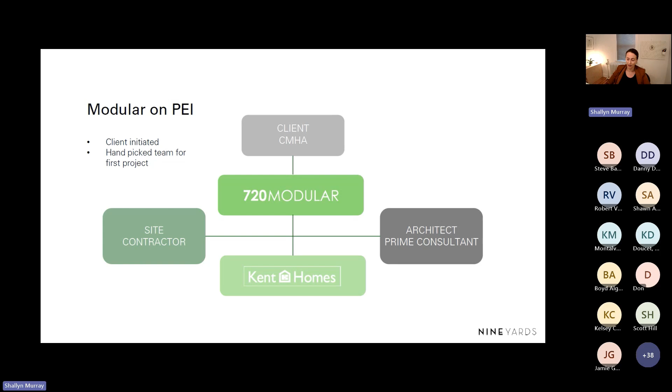Since that time, we've done a lot of modular projects. We have 5 built projects: 2 are apartment buildings, 2 are overnight emergency shelters, and 1 was an office building. In progress right now, we have 2 of our largest buildings to date, 6-story apartment buildings, 1 family housing and 1 seniors housing. They will be by far the largest volumetric modular projects done in the Maritimes and across Canada, really. And concept designs: municipalities in particular are looking for designs that can be modified to fit many different sites and areas. These are some of the proposals we've put out over the last few years.

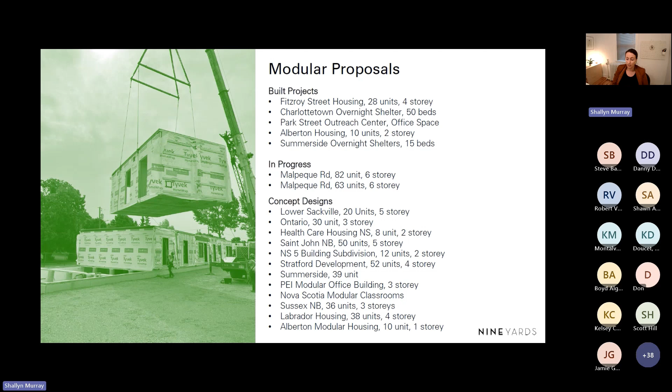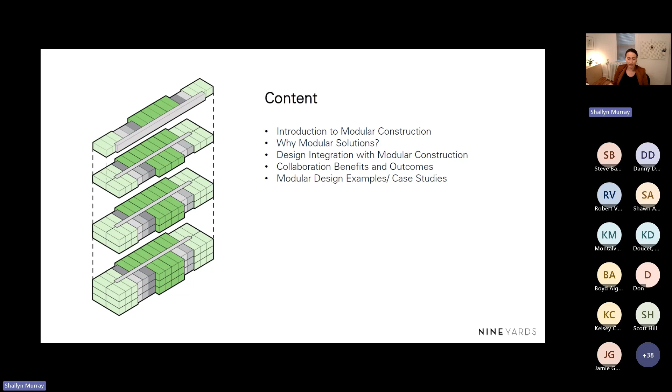So just a little summary of today. I'm going to keep this fairly high level, but I want to talk about why we would consider modular, some of the design principles that integrate with modular construction, the collaboration aspect of these types of projects, and then I'll go through the few projects that we did. I think I have about 30 to 40 minutes, so hopefully we have a little time for questions at the end.

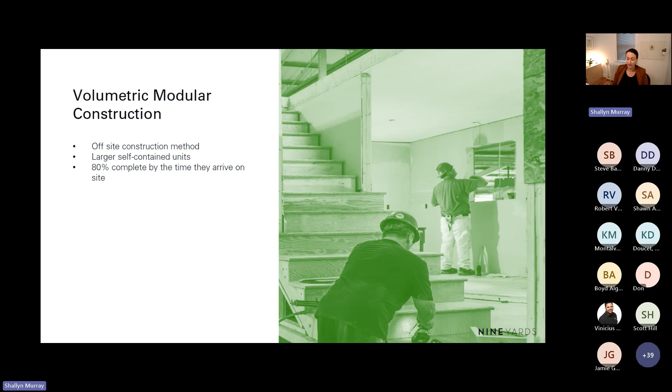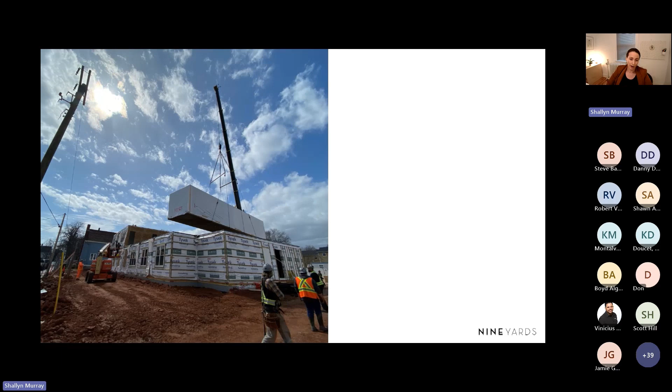So just to start, I want to clarify that modular construction is basically anything that's fabricated off-site. But for this presentation, I'm talking specifically about volumetric modular, which encompasses large self-contained units. So we're not talking about panelized construction. These come as boxes that are pretty much 80% complete by the time they arrive on site. To give you a visual, this is one of our projects being craned in. Each module is fully complete and wrapped for weather protection when it arrives.

So getting into why modular, I mean, I know that everyone here is probably very aware of our housing issues that we're facing across Canada, but I wanted to put a few numbers to it just to sort of paint the picture a little bit. So, PEI needs to construct about 2,000 to 2,600 housing units a year to accommodate our growth, and that's after catching up to the deficit that we already have.

As of recent assessments, Nova Scotia has a housing shortage between 25 and 30,000 and projected that we'll need over 100,000 new dwelling units by 2032. And in New Brunswick, we've experienced a reduction of approximately 8,600 affordable housing units, which represents a 25% decrease. And also mentioned is that all the rents have doubled and tripled.

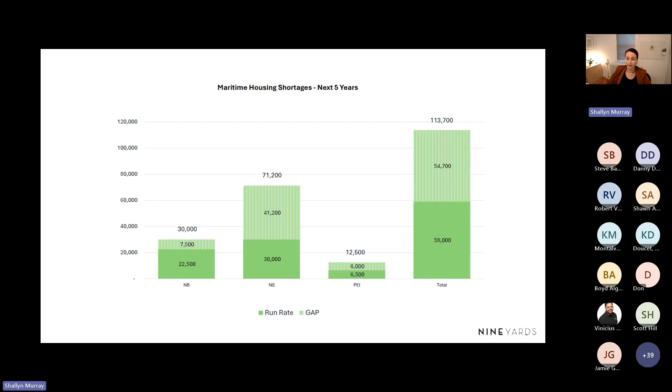And so I think we all kind of realize that we're in a bad position housing wise, and that we need to find as many solutions as possible to get more housing on the market as quickly as we can. And this is just a chart illustrating that, again, for the Maritime provinces specifically, the sort of gap in the light green of what we need to fill in the next 5 years. So modular becomes one of those solutions that we can consider.

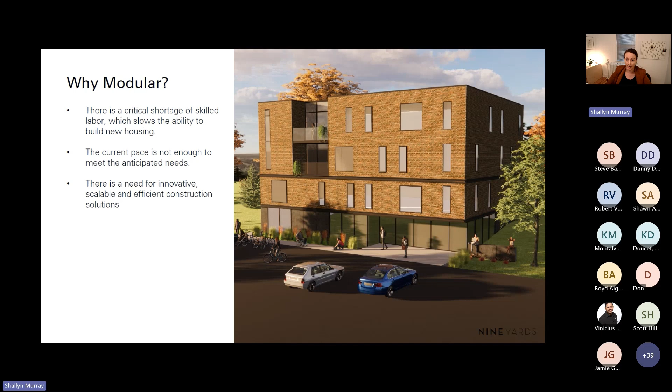There's a critical shortage of labor, particularly in the Maritime provinces, and we really can't keep pace with the current way that we're doing construction. So there's a need for new, innovative ways to get housing on the market. And I think I highlighted modular as a solution here because it's not that modular is the solution and that I think we should all be doing it. But I think it is an alternative way to how we're building now that can put more housing on the market quickly.

And one of the reasons for that is that because 80% of the work is done off-site in the factory, we're allowing local developers, local contractors to keep doing what they're doing and building locally and getting more housing on the market there. And this is providing an alternative method to do the same thing. We're also able to provide solutions in very rural areas where there's not a lot of labor or where people don't necessarily want to go build when other more urban areas are busy.

Supply chain is less of an issue with the factory, although it can still be an issue. But because we're using standardized products that are supplied often, there's less chance of not being able to get these certain products. The biggest question I always have is cost. Is it cheaper? No, it's not cheaper. So if you're looking for the most economical solution, this usually gets put to the side fairly quickly.

But I'm also saying not yet, because I think it's not a widely used construction method here yet. And I think as it gets more popular and efficiency of these things grows, the cost will come down and be more comparable. And I think the other thing that should be mentioned with that is that compared to traditional construction methods, there is a large cost certainty with this type of construction. 80% of the cost is locked in before you start going.

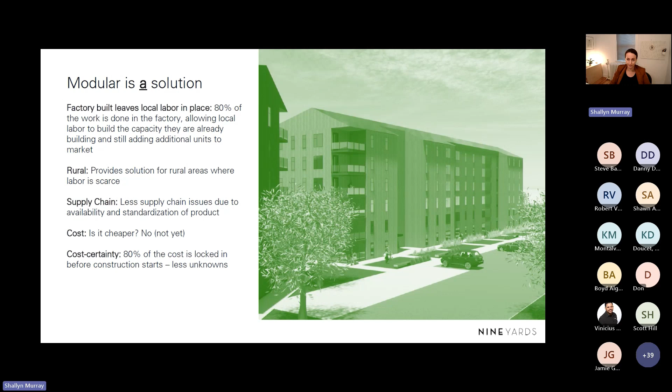So looking at some of the design advantages or ways we look at design in terms of modular, I think maximizing efficiency, minimizing waste is really the key to the factory production. We are using more standardized components, but there is freedom within that flexibility. So, for example, for a typical volumetric box, your length can vary greatly. We've kind of maxed ours out at 60 feet long, but I think you can go a little bit longer, 66 to 68 feet, and then you can shorten those boxes as much as you want. So that's kind of the limitations of that.

And then in terms of width, the most common box is 12 feet, but you can go up to 16 feet, kind of in 1 foot increments. After that, it becomes pretty hard to transport. But I guess the point I'm trying to make is that there is customization within a fairly strict grid.

And this diagram on the right here, this was something we had submitted for an RFP for a municipality, and they really had no idea what their sites were going to be, what their zoning was going to be, their height restrictions. And so we were able to offer them a few different solutions that show how they can get units on a very narrow site, or for a site that has a 1-story zoning or 2 or 3, and just modify that design to be able to fit those different areas.

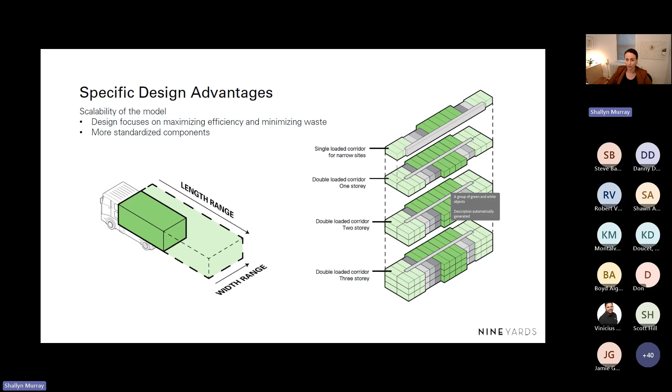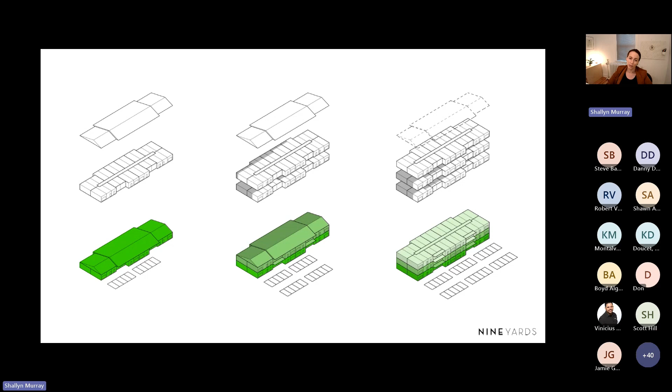And that's just sort of illustrating the same thing, how we can speed up the design process by providing one design that can be easily modified to suit different sites.

So one thing that I think a lot of people are very interested in is speed, and modular construction certainly can be quicker than traditional construction. This top diagram is showing a typical building, and the bottom diagram is showing something that's built modular. Where we're seeing the time savings is you're able to simultaneously build your foundations on site and then build the rest of your building in the factory. So you're gaining time there by building those two things at once.

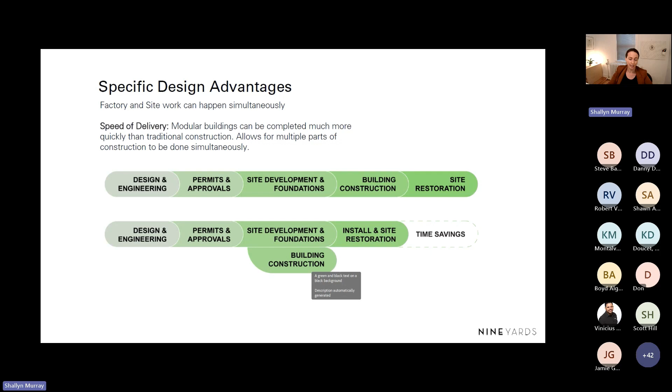In a traditional building, we have to wait till our foundations are done, then we can start our framing, then we can do our rough-ins, our drywall, then our millwork, et cetera. These boxes are being completely finished in the factory. So all the rough-ins are already done, the flooring's already laid, the kitchen's already installed, the paint's already on the walls, the lighting is already in. So there's really a lot less steps, and we're able to gain time at the end by doing that. And while I would say it's not necessarily cheaper, there is obviously cost saved in getting the building 30 to 50% faster at the end of the day.

And this is showing a similar thing for flexibility. We have flexibility again within a strict grid. We do completely custom interior layouts. We do custom finishes on the interior and on the exterior, and we can customize the building function. So it's really the balance of those two things. You'll see from some of our case studies, we have done fairly rectangular buildings with some variation. But that's because we're doing affordable housing, and that's the most economical method to do it. But if you want to do something interesting and a little bit more playful, there is opportunity to do that within that grid.

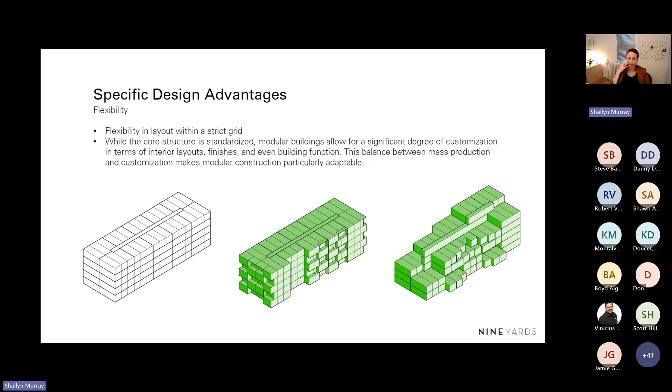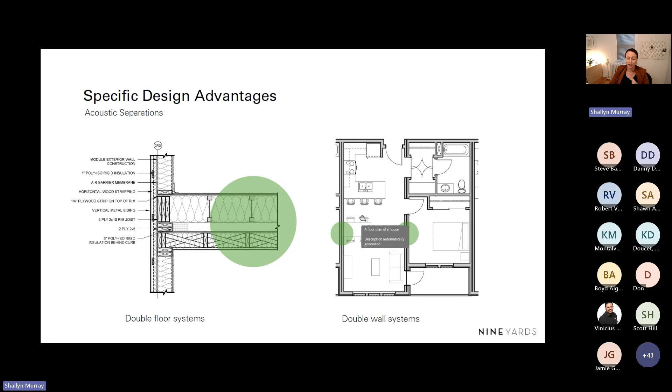So this is getting a little bit more into the details, but acoustic separation is a very important consideration when we're talking about multi-unit residential. Modular has an advantage in that each box has its own ceiling and floor. So when you stack those up, you end up with a double floor system. You can see in this first detail, this would be the ceiling of the unit below, and then the floor system of the unit above with an air gap in the middle. So you're getting naturally a great STC value, and because of that, when you're inside these buildings, you can see how quiet they are. And similarly with the walls separating units, we also have a double wall system with an air gap. So you're getting, again, a really great STC value.

And one of the last things I would mention is quality control. I'm not going to get too into the factory because that's honestly probably its own lecture of how they make this work. But one thing is that everything's done inside, so you're having fewer weather delays. You have consistent quality of every component that you're building. And the factory is set up to have continuous inspection, so they have quality control there every day on every step of the way, making sure that everything's done properly.

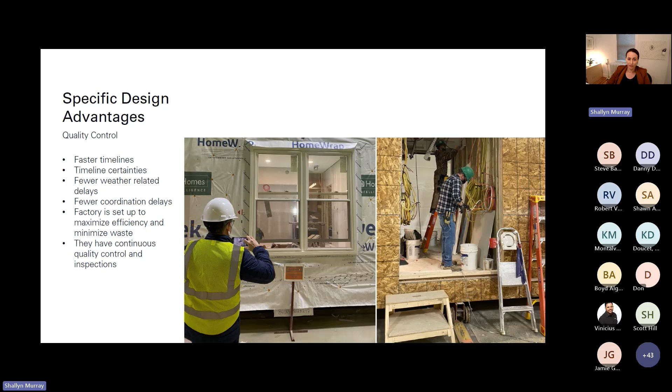So this is a couple of photos we took. For each project we do, we go to the factory periodically and do our inspection to make sure that everything is how we need it to be. Essentially it's basically an assembly line. If you've never had a chance to visit the factory, I would certainly recommend checking it out. It's very cool. They basically build the floor system, then they put the flooring on, then they move it to the next station. They put the walls on, they move it to the next station. So it's very methodical, very organized, and very efficient.

And so I just wanted to mention a couple challenges that also come with navigating this. And one of them is the regulatory authorities. We've actually had a great experience here on PEI, but I think this is still new for a lot of places, especially maybe more rural places. And trying to get something approved that someone's not familiar with can be challenging.

So I think, our first building here, there was a lot of questions about, how do we make sure this all works? We know that the authorities having jurisdiction are not going to travel off island to go inspect things. But we've kind of come to a position now where we're providing the CSA standards with the modules. So that's certifying that each module is meeting the codes that it needs to.

And then we have the architects and the engineers in place to make sure that when they're assembled, that whole building meets code. So I think there's ways around it, but that's something that certainly could be a delay in a project if it's something new in a certain location.

Secondly, I think perception and acceptance of modular construction still has a very negative connotation. I think it's perceived as a very cheap solution. It's perceived as not as aesthetically pleasing. So I think that's always a challenge to get around.

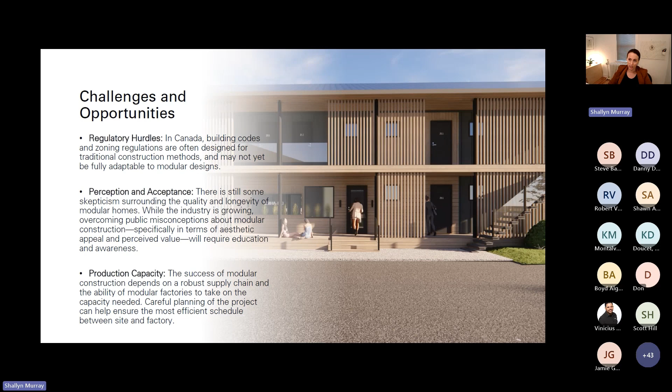And then I didn't put it on here, but of course, cost. If I'm presenting to a developer a regular wood building and modular, and one's more expensive than the other, that's always a challenge to get the more expensive one to go through. So that's something we're continuously dealing with in our proposals.

I just want to touch on this lightly, because I think the process of the modular design is a little bit different. I think the design mentality is the same, but how we deal with all the players is very collaborative in modular. So in our typical design-bid-build projects, which most of us are fairly familiar with, the client and the architect are dealing with each other together, kind of coming to a design, finishing that design.

And then when you go out to tender or you go out for pricing, that's when the contractor gets involved. And with pricing volatility lately, that often means going back to the drawing board and doing some redesign to get the budget down. In our modular projects, that process is integrative through the whole thing.

So from the first design meeting, you have the architect, the engineers, the manufacturer, 720 Solutions, the modular expert, and the client all in these meetings. So you're all making decisions live every week, and you're all getting immediate feedback. So immediately if something doesn't work or if something's going to be too expensive, you can make those changes quickly. And that accelerates the whole design process. And it also ensures that everything's fully coordinated. So we're just seeing fewer things left out.

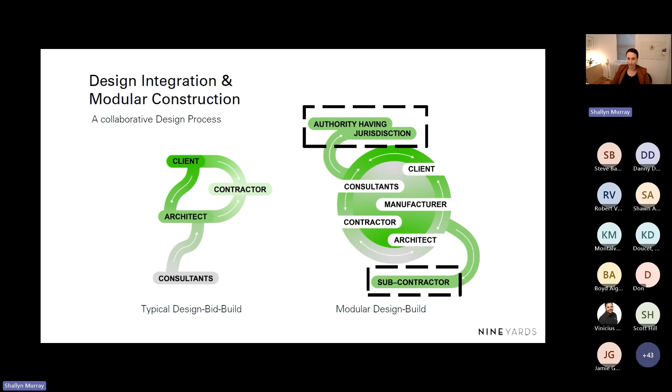And so a few case studies I just want to go through. These are just some renderings of projects we've done for proposals, and most of them are multi-unit residential. The one in the right top corner is an office building. So there are multiple applications. I do think that it's definitely suited probably the best for multi-unit residential, just the sizing that the modules come in.

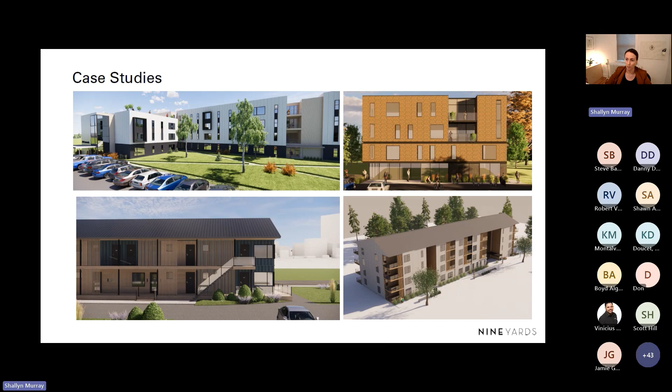So these are the three models that we've built, and I'm going to go through each of them in a little bit more detail. But Alberton Housing is the first one on the left, and it was made for a very narrow site. So it's on the same site as a community center. So it's basically half of a building. It's a single loaded corridor, but everything's accessed from the outside. So it's almost like a motel typology.

Fitzroy Street in the middle there is a very typical apartment building model. It's a double loaded corridor. The most efficient way in modular is to cap the services on the ends, so having the stair exits and the elevators on the ends. So that was sort of the first thing we tried. That was the first building we built.

And then thirdly, Malpeque is the project that's under construction now. And there's two buildings, and it's also similar in that it's a double loaded corridor layout. But we did pull the services inbound of this building because they wanted to do family housing where they have a lot of 3-bedroom, 4-bedroom units. And so we really needed to maximize those corners to get windows in there. And I think that diagram's showing 8 stories, but it is only a 6-story building.

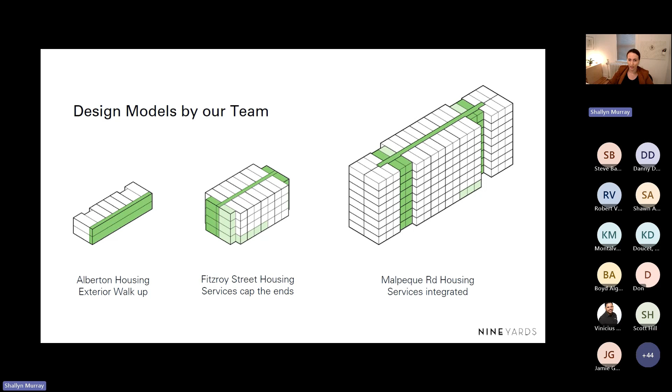So I'll start with Fitzroy because this is the one we did first. And because it was our first project together, the design process probably took a bit longer than it would have otherwise, because there was quite a bit of learning involved in the process of modular. So this building is right downtown in Charlottetown. It's 28 units, 4 stories.

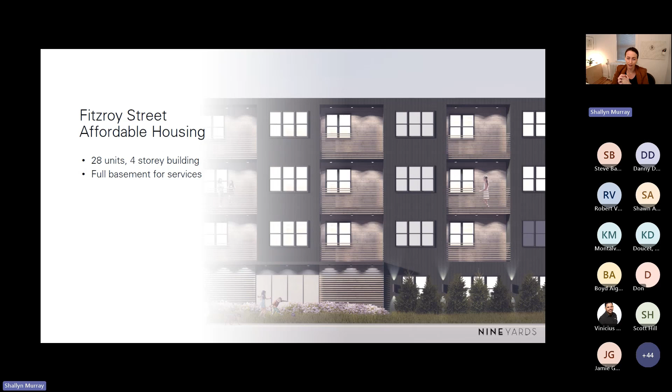And they also have CMHA offices on the main floor, for tenant support. And then they also built a full basement, which has meeting spaces that the community is welcome to use. So it's kind of like 3 boardrooms, which the community is welcome to use at will. And I already sort of talked about this, but this is the double loaded corridor model.

So getting into the modules themselves. So the module itself is lengthwise here, so top to bottom of page. And so you'll see immediately that for the 1-bedroom units, it takes 2 modules to make up 1 unit. So they arrive like this. We did consistently 12-foot wide modules here, and the length is 60 feet with some insets for balconies.

So when this arrives on site, it already has the living room here, the kitchen's here, it's all built in. The corridor is already there, and all the services within that unit, mechanical, electrical, are stubbed out to the corridor. So the goal of this is really, when these get put on your foundation, you want to be able to close that residential door and not go in there again. So you're really trying to minimize any amount of work in there not to get these units dirty again. They're essentially finished.

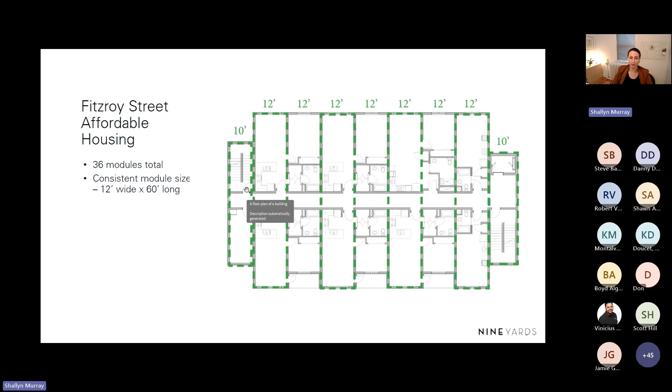And you can see the double wall systems here between modules, so it kind of indicates where the modules are separated. And then these openings are put in advance to enter between the 2 units. So you can kind of imagine, when you get there, this doorway between the 2 modules is sort of the part that's unfinished. So you have to go in and patch those areas. But otherwise, we try to make everything done from the corridor.

So this building is a mix of 1 bedrooms and studios. It's mostly for a single individual. And the studios are 1 module, so they are quite small. It's kind of like a little bachelor apartment. They're a little less than 300 square feet. But that is good for the affordability aspect of this. And the 1 bedrooms are basically double that, so around 600.

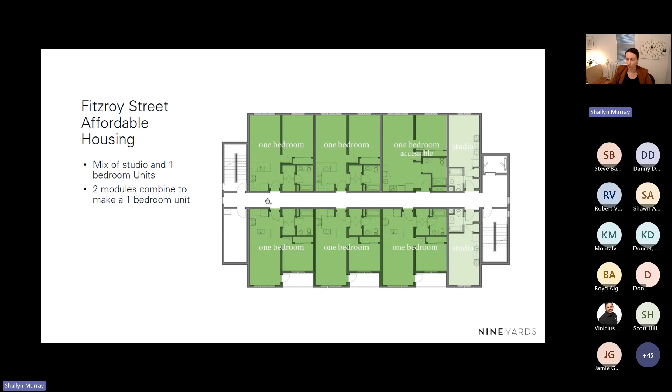So this first project, from the beginning of design till occupancy, we completed in 14 months, which was pretty quick, but I think we probably still spent about 5 months in the design phase. So we tried to sort of speed that up in the future projects.

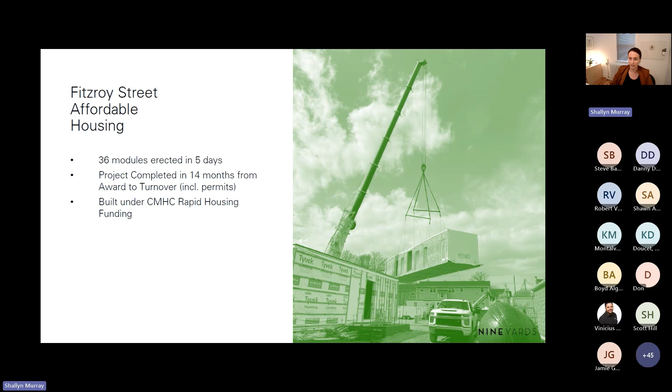And I think it's worth noting, if anyone's heard of the Rapid Housing Fund, that was a fund through CMHC they put out to do modular solutions that would be up in a very short time frame. And this project did receive that funding, which they were able to put 28 units at least partially funded by that fund. So that was really great. And that's just a photo of the building as the 3rd floor is going up, and you can kind of see the insets for the balconies here.

So that was it for that one. I unfortunately don't have a photo of this finished, but you can probably see it on Google if you're so inclined to search it. And we are getting our projects photographed now, so hopefully we'll have some nicer finished photographs in the next while.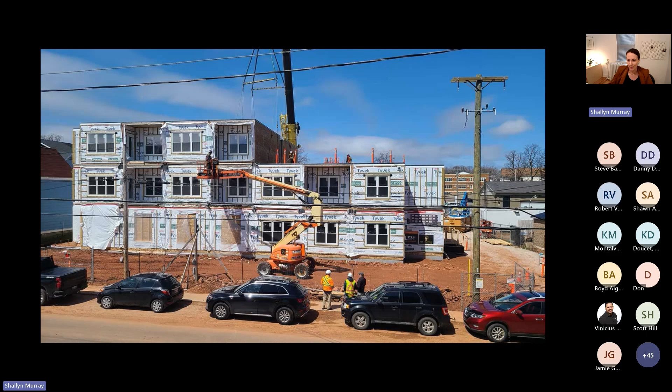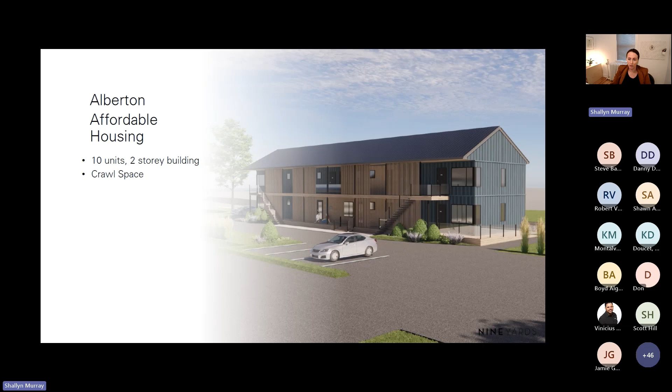So Alberton, I think, was a really great example of a different model. And again, this was through CMHA, and they really wanted to have a few examples of buildings that they could put in different locations. They own numerous housing units across the island. So again, this one was a smaller footprint. It's only 10 units, 2 stories, and we didn't do a basement in this one. We just have a crawl space for access. And again, this is just showing the model. We have a single loaded corridor, walk-out style exterior access.

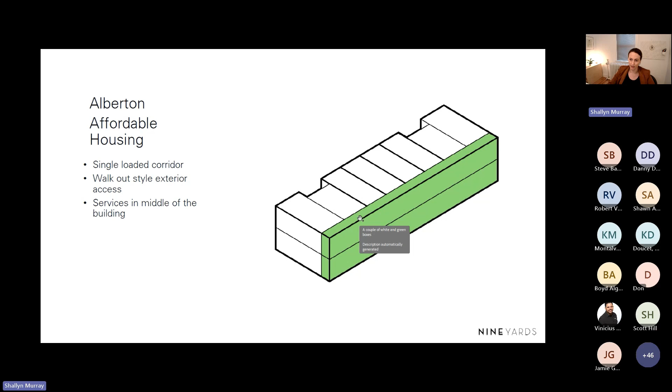And so this is the modules for this building. So it's 10 units, 18 modules. Again, we do have 1 bedroom units, so we have 2 modules per unit. And this one we went a little bit wider. We kind of wanted to see if a 14-foot module would make a large difference in the bachelor units, and honestly it did. It's wonderful for the studio units. It just gives them that nice width to put a larger bed and have a little bit bigger living room.

Honestly, I don't know that we needed 14 in the bedrooms, and we would probably go back to 12 in that, because they do seem quite spacious for affordable housing. But I think what was really nice about this project is it has natural light on both sides. So these are very well lit units. They're very nice inside. The tenants are super happy.

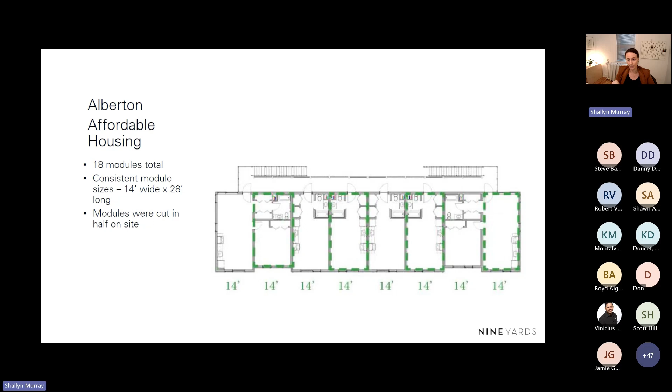And one interesting way that the factory did this to maximize their efficiency, because this is essentially half of a 56-foot module: they built them as 56-foot modules in the factory, and then they brought them to site and they just cut them in half. So that was able to really cut down on transportation costs bringing them over to the island, and it went really smoothly. And that's just showing the floor plan. Again, it's similar to the previous one bedroom and studio units, and they do have tenant support services on the main floor.

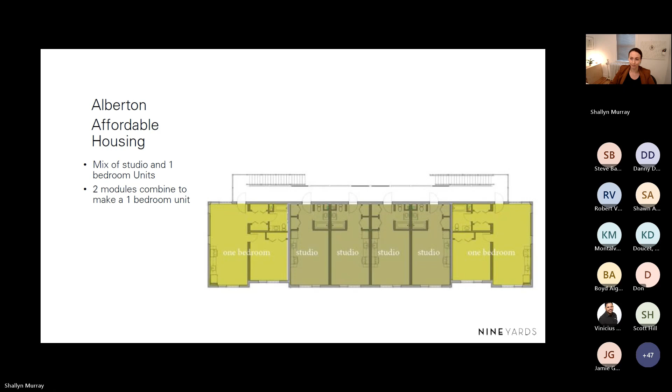So this one was 18 modules in one day, which was amazing. Alberton, if you're not familiar with PEI, is 2 hours from Charlottetown, essentially. And by the time I got there, I almost missed the whole thing. So it went up really quickly. And another thing, we were really happy about this because we worked with the exact same team, same client and everything. We were able to do a full design package, including construction drawings, in under 6 weeks, which I don't think I could ever promise a client I could do again.

But because we knew all their preferences, everything went really smoothly. And so we were able to really accelerate this project. The project was completed in 11 months, from beginning of design to end of construction. And honestly, I think we could have done that probably in 8 to 9 months.

We had a lot of issues getting siding contractors up to that rural area, and it really did delay things. But yeah, the majority of work was done in 9 months, just waiting for that siding to be finished. And so we estimated about a 30% schedule saving on design development, due to working with the same team again.

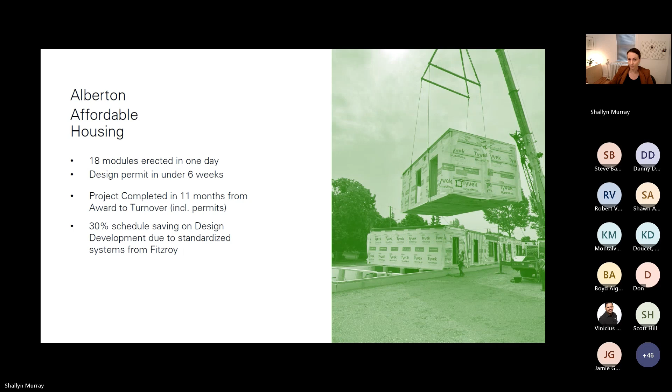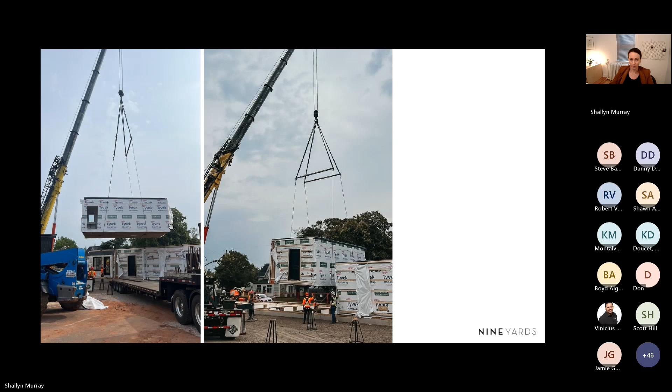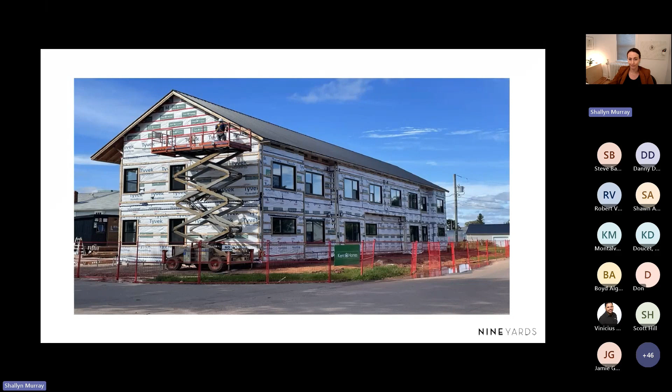And again, I don't have a finished photograph, but this is getting pretty close to done. So you can kind of see the idea, and how we tried to make it not necessarily look like modular construction.

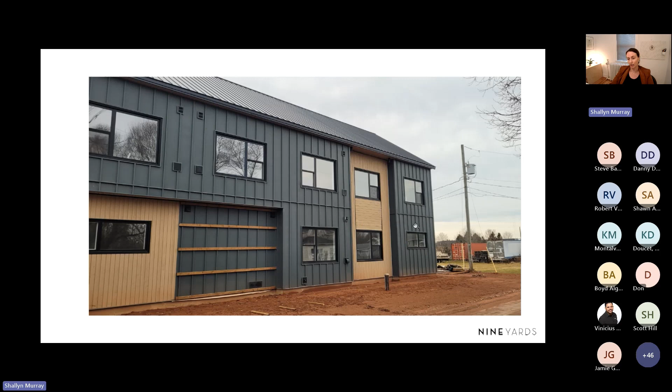And then lastly, this is the project that we're working on now. It's actually 2 buildings that are going in Charlottetown, a little bit outside of the main core. So they're quite large buildings. One is more geared towards seniors, and the other one is more geared towards family. So there's 82 units and 63 units. So these are quite a lot of units in this step 1 development. And one has a full basement and one has a crawl space, so they're slightly different in that respect.

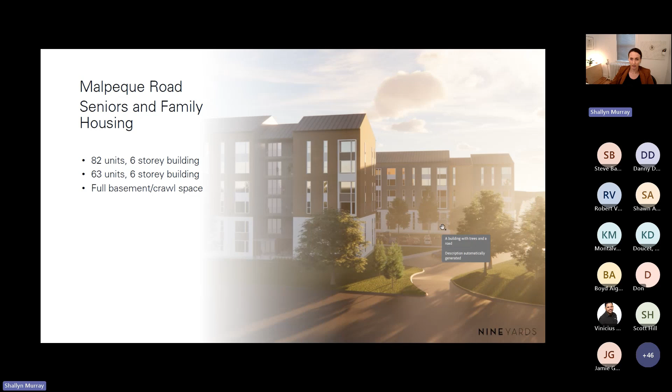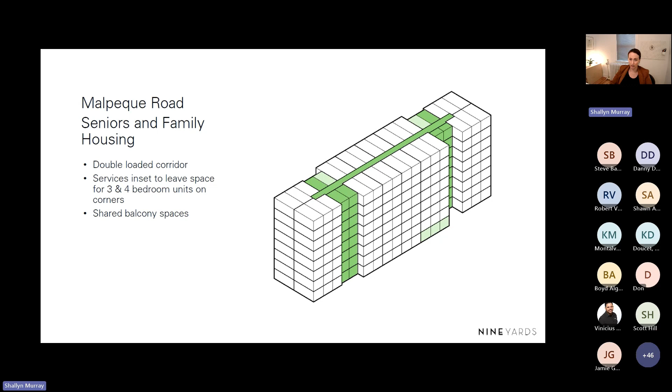And again, this was sort of just the model that we were looking at, to allow those 3 and 4 bedroom units to be on the ends. Instead of individual balconies here, we did shared balconies, again, as this will be affordable housing. So for this one, we took the lessons learned from the previous 2 buildings, and we used the width of the modules where we needed them. So there's 114 modules per building, so there's a lot of boxes.

Again, like I had mentioned, we thought that 12 feet is really enough width for a bedroom. So we left the bedroom units at 12 feet wide. We increased the living room and kitchen areas to 13, where people are going to be spending most of their time. And then in the larger 3 and 4 bedroom units, we increased this module further to 14, since there'll be more people in those units. So it is kind of a mix of widths.

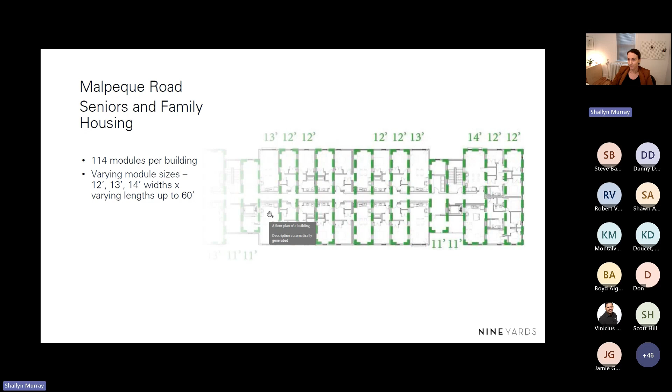The lengths, again, are consistently pretty much 60 feet. But we do have these inset areas on each side, and our service blocks are a little bit narrower just because they can be. I think they're actually 11'6", so there's kind of a mix of things. So these are the 2 buildings.

The first one, the top one, is the seniors building. And so it's mostly 2 bedroom and 1 bedroom units, and there are a couple studios for a single individual. But again, the 2 bedrooms are on the end, so we're able to maximize our windows into bedrooms. And then you'll see that 2 bedrooms really requires 3 modules. And then 3 bedroom and 4 bedroom is also 3 modules, just organized differently.

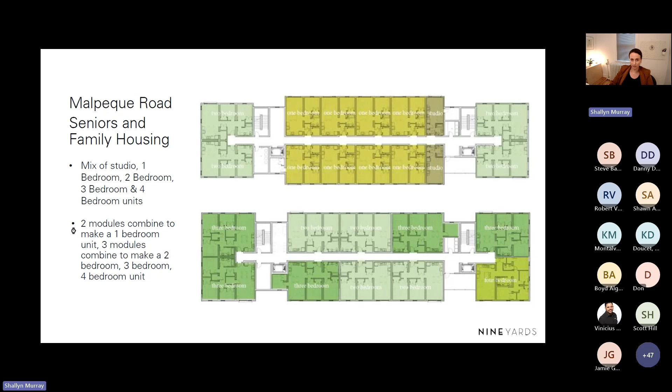So the multifamily building, because there's really not a lot of 3 bedroom housing units on the market, we tried to keep as many of those as possible, and add a few 4 bedrooms for flexibility. So that's the layouts. And then this is where we are now.

So the foundation for building 1 just got poured, and we're currently working through shop drawings for the modules with the factory. They're starting on the line in January. So modules are going to start arriving on PEI mid-February, and the foundation will be complete by then. And basically the idea is to be done in summer of 2024 and then immediately go into building 2.

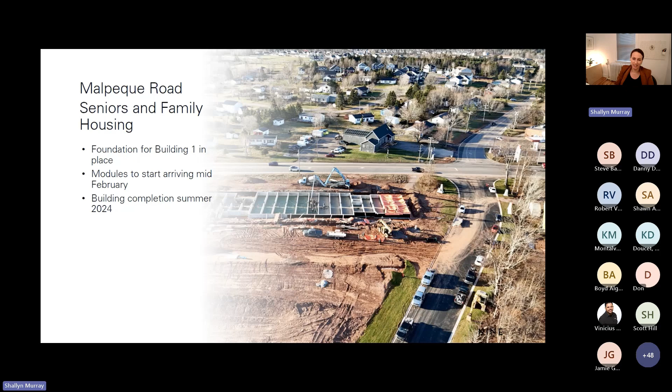So that's just kind of a close-up of that foundation. And you can see we ended up pouring the support walls. So where you have that double wall system, the loads would go all the way down to the basement. You can do those in wood walls, but just because of the time of year we started building this, we thought it would make sense just to pour them in concrete. So each one of these is where the modules are sitting on the foundation.

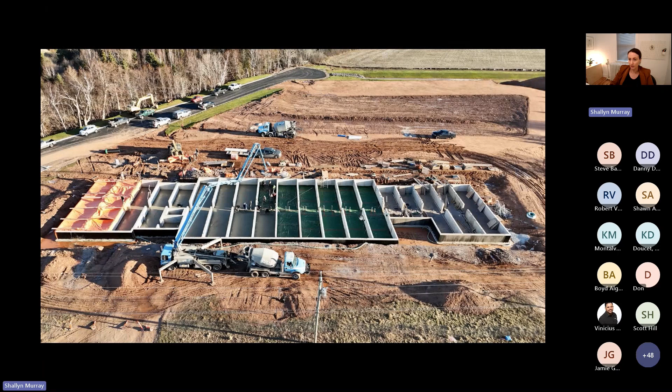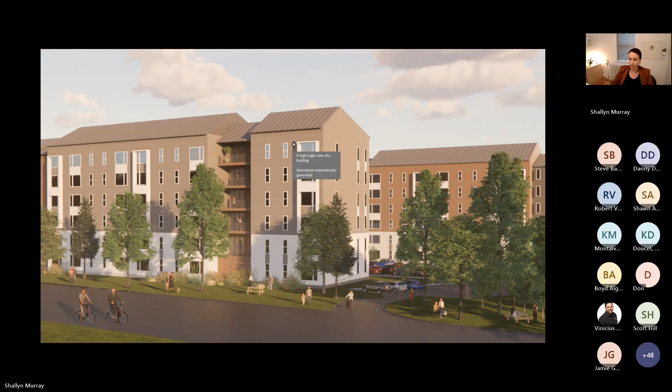And these are just a few renderings showing the idea of what these are going to look like. So you can see here the shared balconies on each floor. And that's essentially all I have. So yeah, if anyone has any questions, I'm happy to try to answer them.